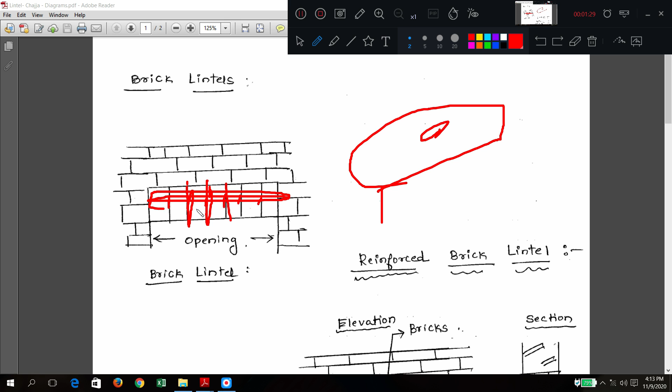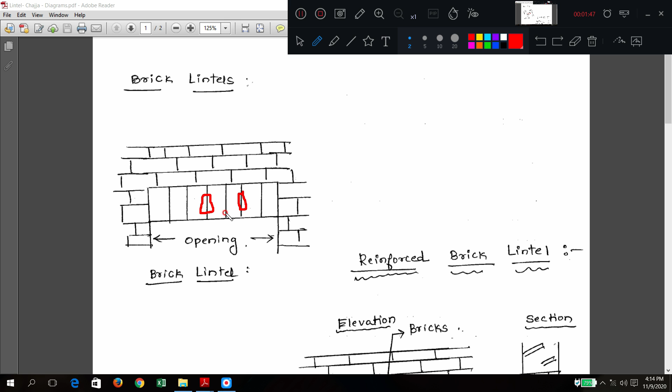This is normal brick. Now, these types of joints are called joggled joints. In module 2, stone joints, we discussed this type of joint. Please refer back to what are joggle joints. I hope it is clear now.

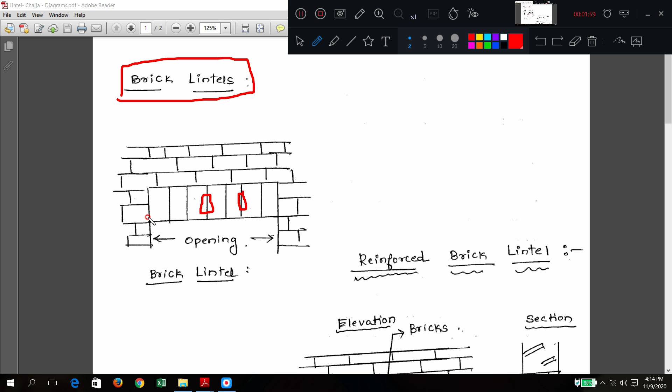Brick lintels are used for smaller spans, less distance, or less load. Suppose you want to use brick itself in construction of a lintel, but the load is a little larger and the span is also a little larger. Then you can go for reinforced brick lintel.

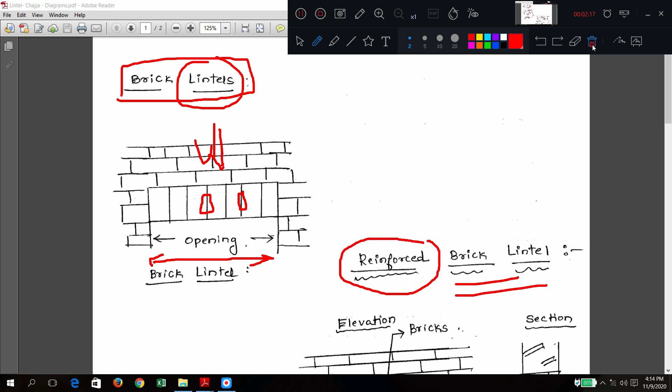I will just enlarge this portion. What are the main points here? Reinforcement means the same construction, but using some reinforcement bars at the bottom and some in the vertical portion.

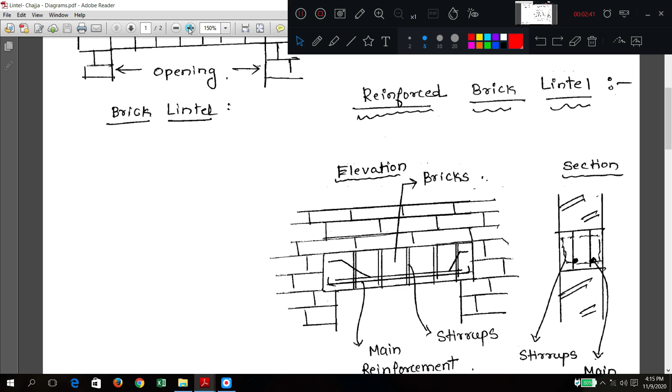I will enlarge this a bit more, and draw it in the green line. So there is a brick. This is the elevation, but in cross section, how many bricks can you see, how many columns of bricks? Here you only see the front face, but the thickness may include one, two, or three bricks.

For each brick there is a small gap, and in that gap you are putting steel bars. Very important — these are the steel bars. In the section these appear as dots, but in the longitudinal section these dots appear as this line. I hope it is now clear.

Very engineering, this one. I hope everyone is an engineering student now. In cross section it appears as a dot, but in elevation it appears as a line — this shouldn't be difficult to understand.

Similarly, these horizontal bars inserted between the bricks in this fashion are called main bars, or main reinforcement. I repeat: the dots in the section, shown as a straight horizontal line, are called the main steel or main bar.

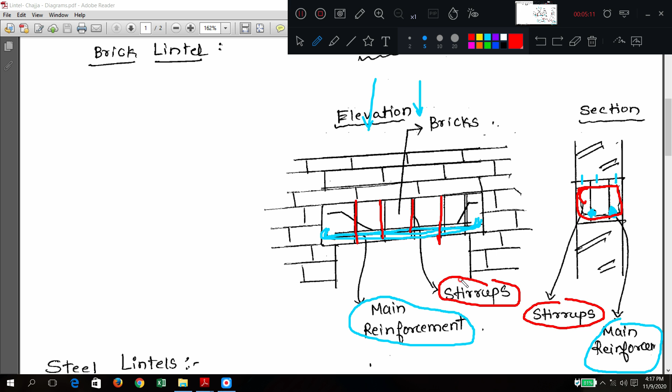So this type of bars are called stirrups. These stirrups will provide shear strength. Main steel provides bending strength, meaning it is not going to allow this lintel to fail in bending. But stirrups will provide rigidity for the shear. That is why these are called stirrups.

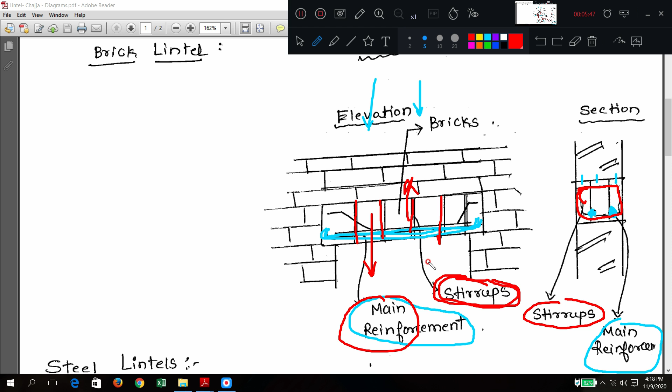Shear means cutting - one side will go down, one side will go up, like sliding taking place between the bricks. We studied this previously - remember those points. So to control that shearing of the bricks, one going up and one going down, to give more rigidity, we are providing stirrups.

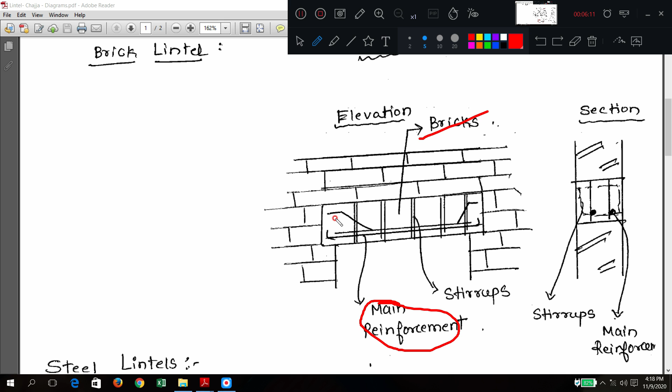Now what is the point here? Bricks are there, you are providing main steel in the horizontal direction. What is this small line? This is called cranking of the bar. Cranking means the same horizontal bar is bent near the supports - this is one support, this is another support.

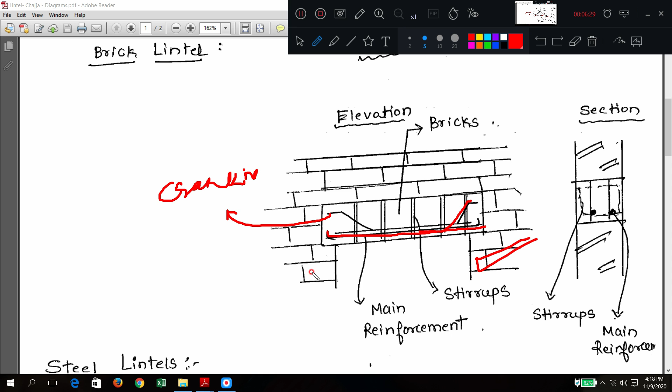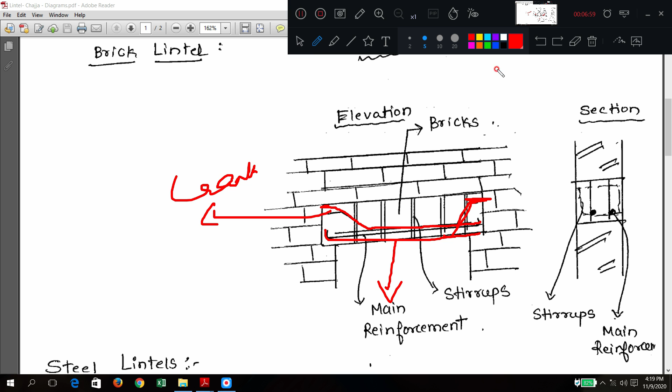What is happening in cranking? The longitudinal bar or main bars nearer the support are bent upward like this - the bar is moved here and made to bend upward and again go back. This type is called cranking of the bars, and it gives more stability. Generally 8 to 10 mm dia bars are used. So we will see in the text portion what this is.

Reinforced brick lintel - we will go fast since this is already explained. When loads are heavy and the span is more, we go for reinforcement.

So generally what is the depth? Depth is kept 10 centimeters or multiples of 10 centimeters. Why is it like this? I will go to this diagram - depth of the lintel is this distance. It is kept 10 or multiples of 10 because brick size itself is 10 by 10 by 20, so to have uniformity in construction, generally depth is taken as 10 centimeters or multiples of 10 centimeters.

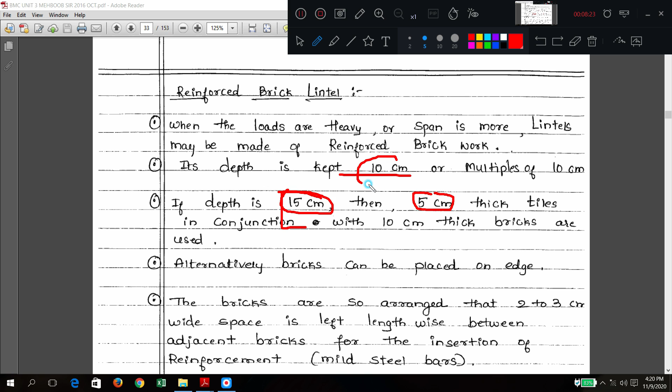I hope this is already explained - if the depth is 15 centimeters, then 5 centimeter thick tiles are used. It's not so important, just remember this point. Generally these are used for smaller spans, so 10 or multiples of 10 are used. If 15 centimeter depth is used, then 5 centimeter thick tiles are also used.

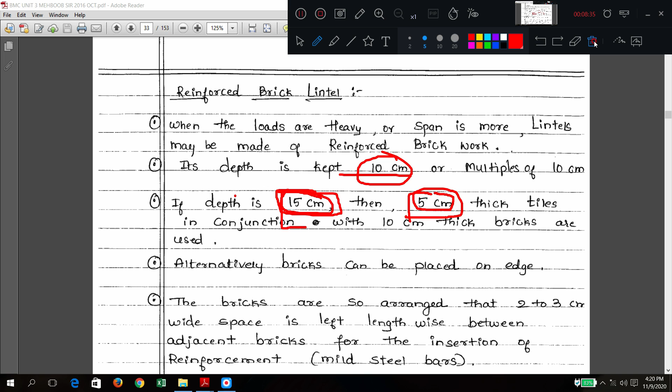How is the combination? Total depth is 15 centimeters - up to 10 brick is used and the remaining 5 centimeters is tile. That's all. Alternatively bricks can be placed on the edges - this is very important, so it is placed on the edge side.

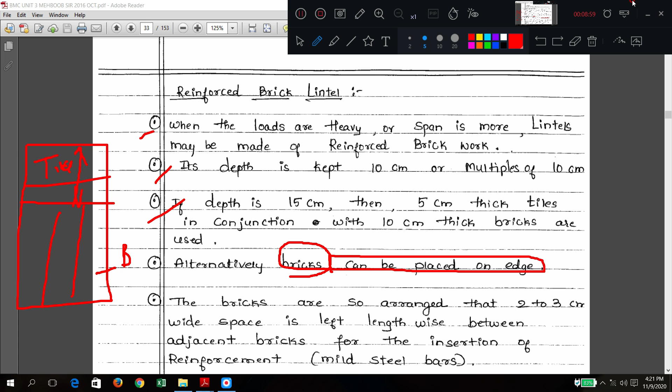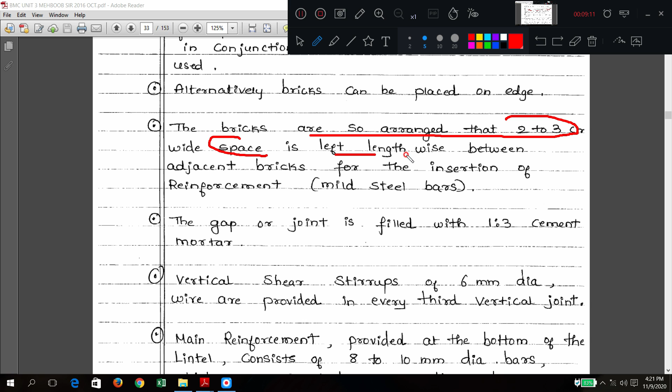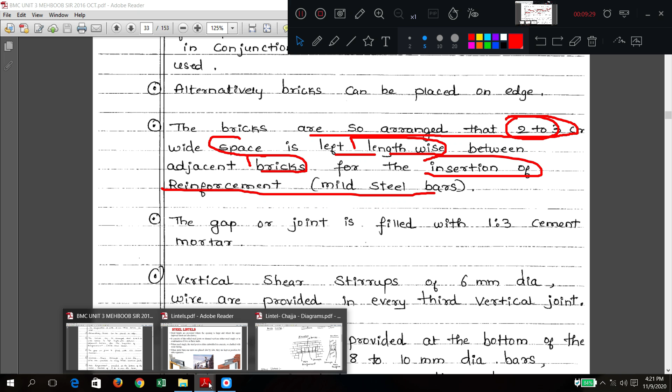Bricks are so arranged that 2 to 3 centimeter space is left lengthwise between the adjacent bricks for the insertion of reinforcement. Where is that 2 to 3 centimeter? Go to this diagram. This subject requires explanation this way only, you need to have reference with the diagrams continuously, then only you will understand. So this is the 2 to 3 centimeter gap here, between adjacent bricks.

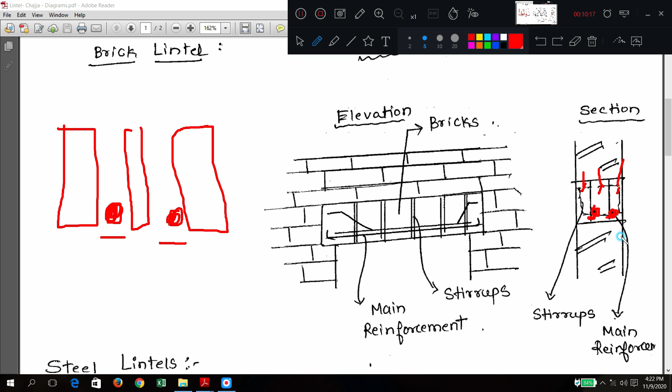So I will make like this: one brick, two brick, three brick. Okay, it is not up to scale, so this gap is the 2 to 3 centimeter gap. In between, you are going to put reinforcement like this. That is shown in this diagram. I hope now it is clear: 2 to 3 centimeter gap between the adjacent bricks to insert the main steel.

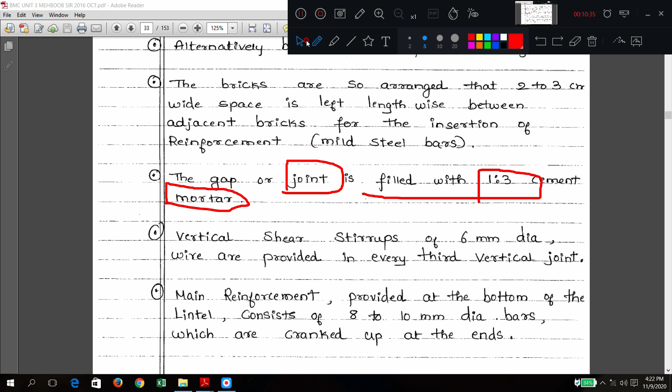So whatever joint is there, the gap or joint is filled with 1:3 mortar. That gap is there. Where is that gap? Yes, here, this gap. Whatever gap is there, you are going to fill using mortar.

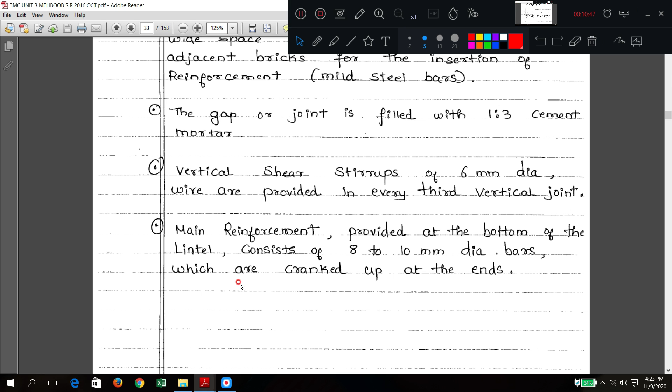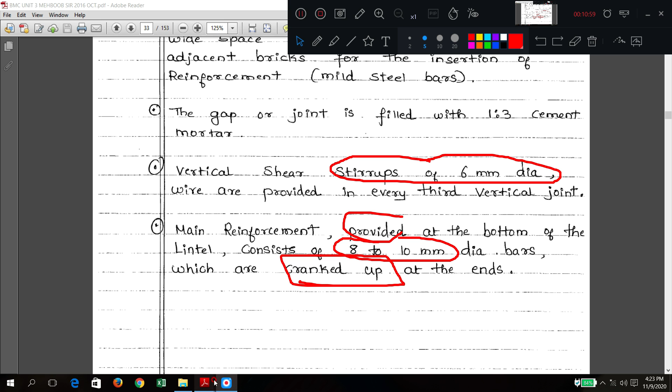Now next is what? Vertical stirrups of 6 mm dia and main reinforcement of 8 to 10 mm dia, which are cranked at the ends. This point I have already explained when I was showing the diagrams. So vertical stirrups, the general dia of these bars is 6 mm. This horizontal bars which are cranked near the supports are appearing like this, and this dia is 8 to 10 mm. I hope this reinforced brick lintel is clear now.

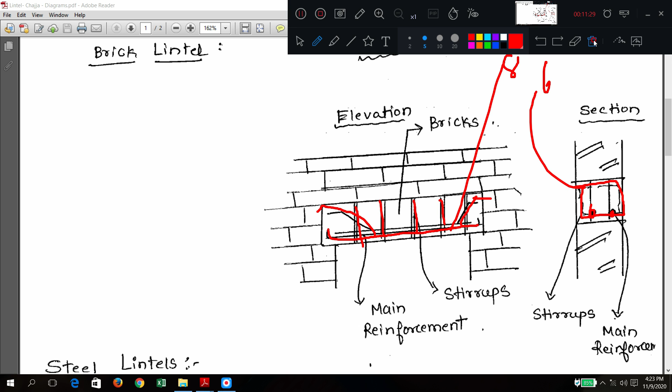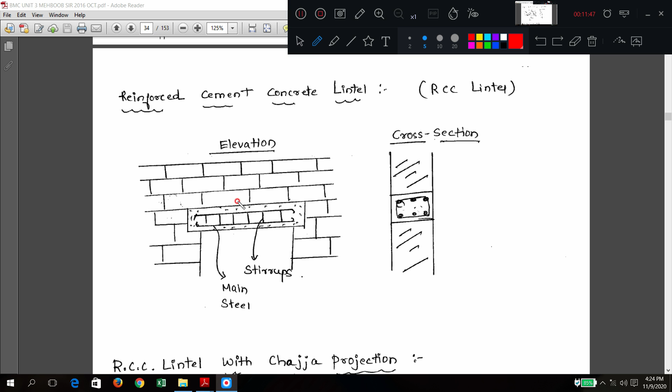Next is reinforced cement lintel, that was brick. Here total concrete itself you are using. If you enlarge this portion, it is made up of concrete only. That is why they are called RCC, reinforced cement concrete lintel.

What they are doing: first they provide centering, shuttering support here. After that they will give formwork, casing work, formwork like this. After that they will place the steel bars and stirrups, everything they are going to place. When everything is fixed, they are going to pour the concrete, and they will make it spread equally, distributed equally, and they will compact it.

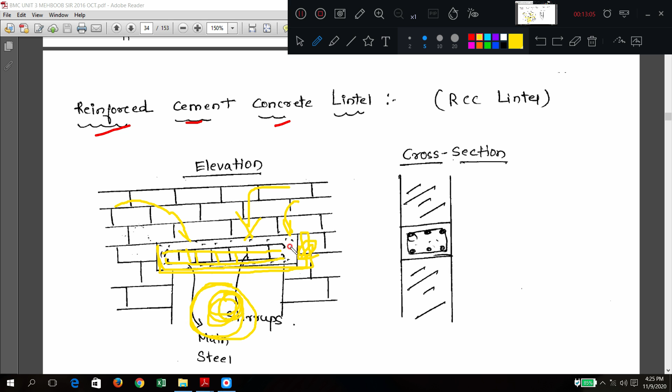And they will leave it for 20 days, for curing purpose. After the curing, it will be sufficiently strong and it will be taken — the centering and formwork is removed, de-shuttered, it's called de-shuttering. Once that is done, the lintel itself is very strong and it will carry the loads. I hope it is now clear what they are doing.

First, the brick wall, that is supports, they are going to construct. Second, they are going to put centering. How they are going to put centering and shuttering? They will put vertical bamboos like this, and place vertical horizontal steel plates like this, and in the sideway they are going to put more steel plates. Inside they are going to put the steel bars and stirrups.

Steel bars means main steel and stirrup steel, both made up of MS bars only, 6 mm dia as well as 8 to 10 mm dia, both diameters can be used. Once everything is fixed, steel bars are placed in place, and shuttering is correctly done accurately. Proper support work is provided in the form of props, bamboos, and the bottom is sealed down. Later, concrete is placed inside, and small vibration is given such that concrete is spread uniformly, and it is left for 1 day like this.

And after 1 day you start the curing process.

Provide water for the hydration of the cement. Later on, after 20 or 21 days, you remove the vertical props, you remove the bottom shuttering work or centering work, as well as side formwork. So after everything is removed, it is already strong. Later on, you can go for construction of the masonry on the top.

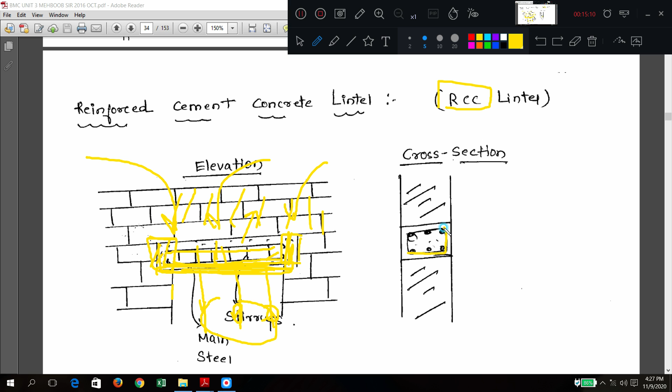So this is reinforced cement concrete lintel, RCC lintel. Why is it important? RCC lintel means what? Here you can see the bars. So in the cross section, if these are dots, I will go for this diagram. In the cross section, if it is a dot or circle, in the main it is like this. I hope it is now understood.

So top dots are nothing but top main steel. What is this? Full square. These are nothing but the verticals, these vertical stirrups.

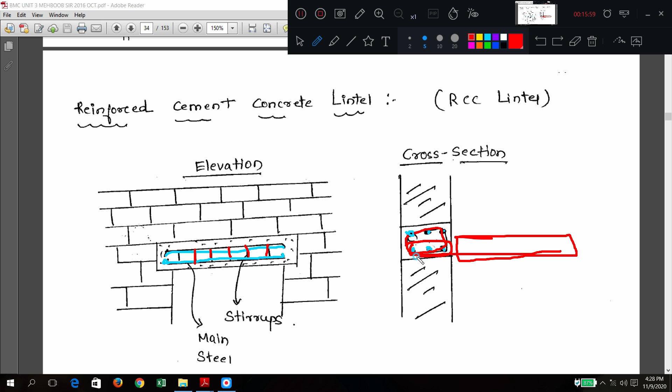Now, if this is a building wall, if it is outside, you can give some more extra bars and get it outside, and use it for sunshade. For the same bars, some hook type of structure is taken inside. Means bars only, it can act as a chajja.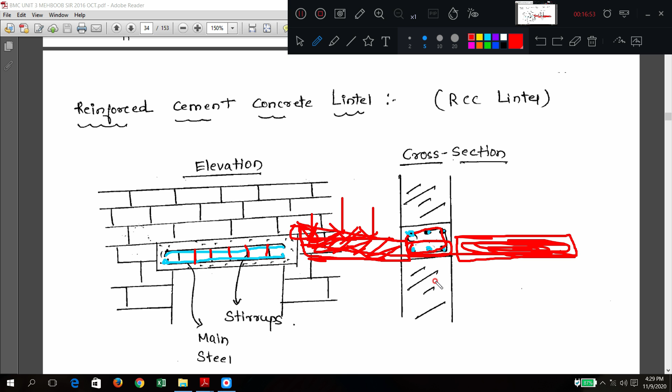Have you seen inside the kitchen? Kitchen generally has chajjas. On top of the chajja you generally keep small water cylinders, cans, everything which is not much of use. That is called as chajja, which is there inside the kitchen or any room. In main halls or entry lobby, the chajjas are not there. In bedrooms, kitchens, and other rooms, the chajjas are provided throughout the periphery of the room, to utilize the space, and on top of this chajja you generally keep instruments or small home things. So outside part is called sunshade or sunbreaker.

This is the reinforcement bar. So they have taken support bars, and above that again some distribution steel they have provided. Everything is casted in the concrete. Later on it will give a strong horizontal element.

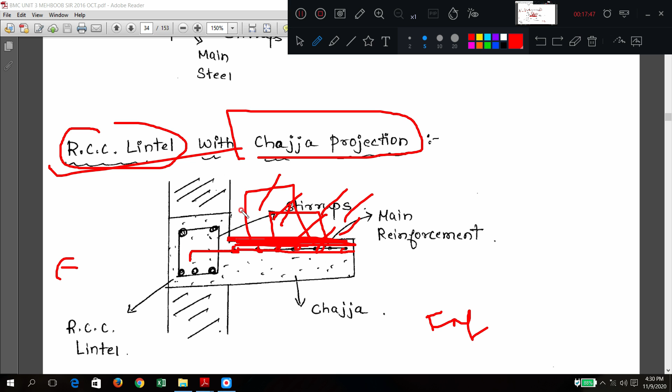On this you keep some small box, small things inside your room. So everything is kept here. This is the cross section of RCC lintel with the chajja projection. Very, very important from the exam point of view. Many times they have asked this question only.

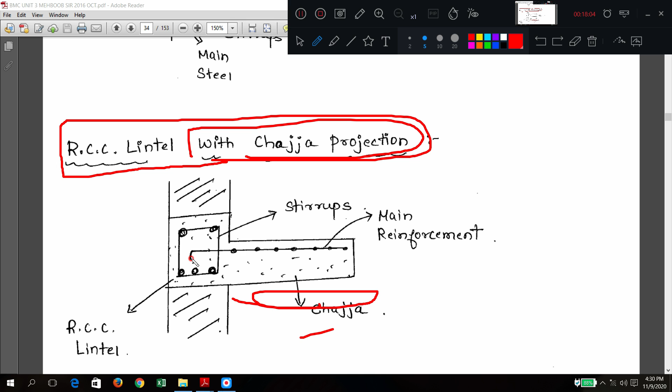Draw the typical RCC lintel with the chajja projection diagram, you have to draw. So this portion is called chajja. The bar which is coming from the lintel is called main steel. On the main steel you have distribution steel, these are called distribution steel, running continuously like this on that side.

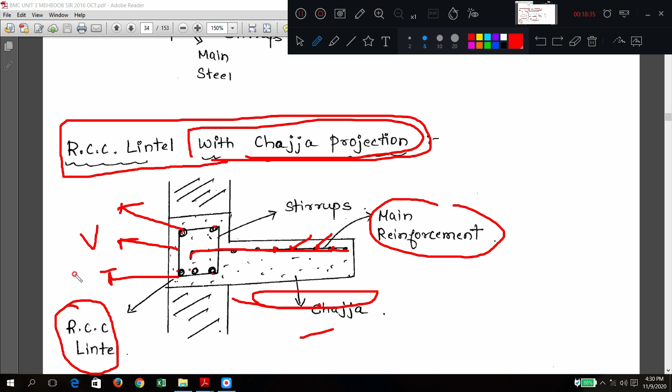And this section is called lintel. So this is called RCC lintel. These are called main steel, this is also main steel. This is top main steel, this is bottom main steel, which are horizontal, and this is vertical stirrups. Everything is concrete.

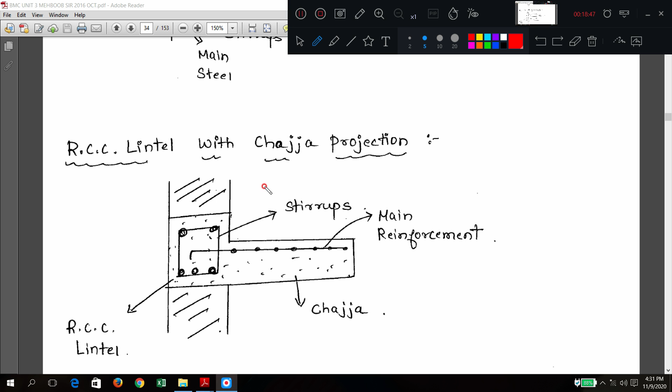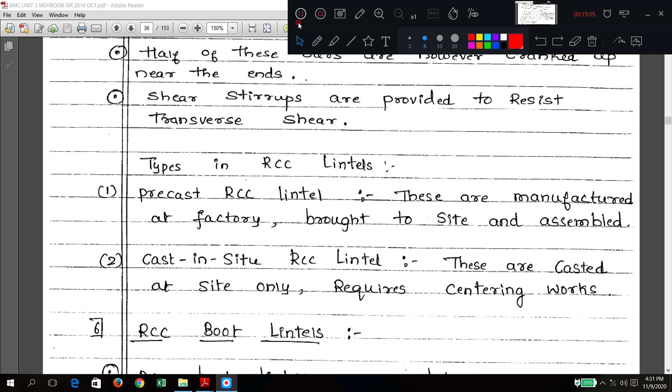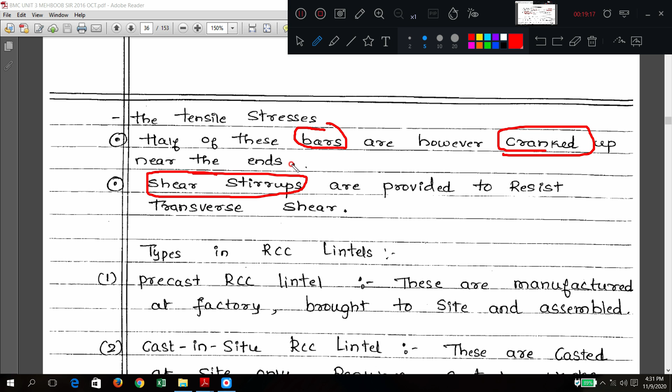Everything is concrete. Now where should I go? Here only. So here also, just now we have seen this. You have bars which are cranked up at the end, and you also have shear stirrups. We are discussing these things. So this RCC lintel, horizontal bars, vertical bars.

So vertical bars are called stirrups.